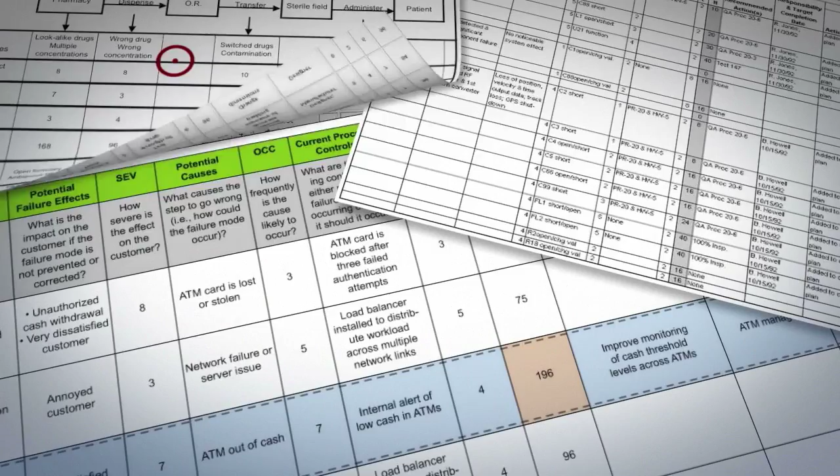Unfortunately, manufacturers regularly incur huge costs related to product recalls, warranty relief, and litigation ensuing from poorly envisioned and executed products and systems. Failure Mode and Effects Analysis, FMEA, is the primary approach used across industries in identifying possible product failures. When conducting FMEAs, engineers ask, what can potentially go wrong here? Finding the answer to this question usually involves numerous and tedious brainstorming sessions. The randomness of brainstorming cannot guarantee that all potential failures are discovered, and that no major ones are missed.

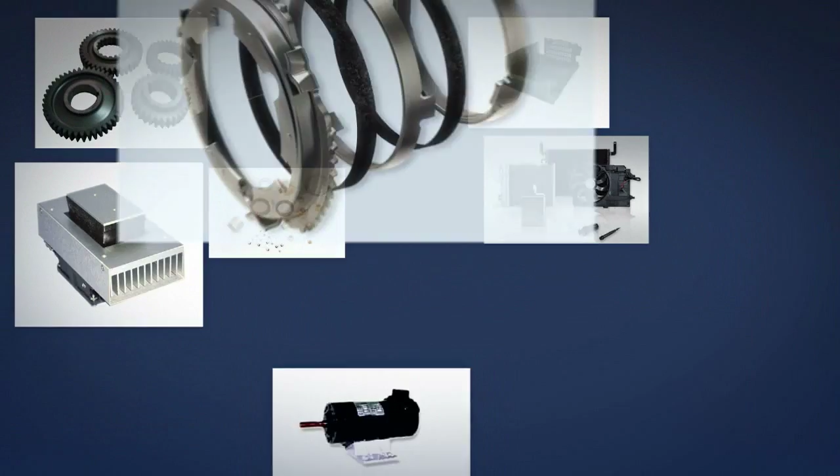In a complex system, such as an automobile, thousands of failure modes may occur, and a comprehensive FMEA may take weeks to complete, even by a team of experienced specialists. The subjective outcome depends heavily on the personal qualifications of these specialists. Complexity is further exacerbated by the integrative nature of modern products, which incorporate highly diverse components based on mechanical, electronic, thermal, chemical, and other properties. Such diversity makes it extraordinarily difficult for engineers, most of whom are narrow subject matter experts, to effectively communicate with one another during the FMEA stages in the product development process.

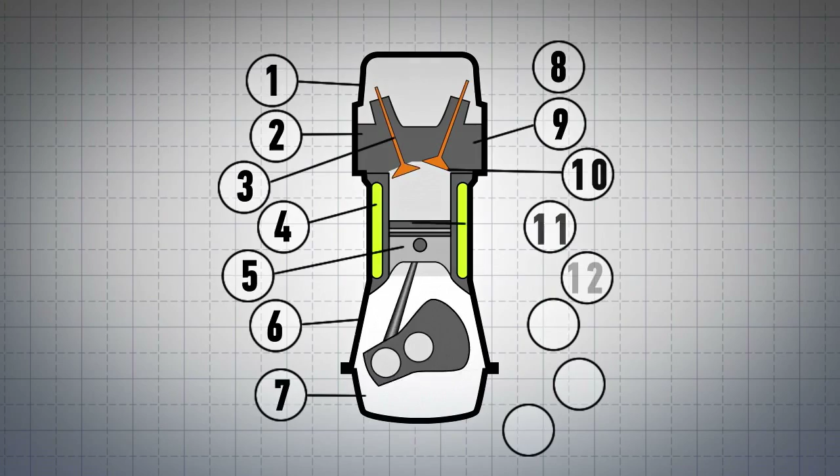As a result, a comprehensive analysis of a relatively simple assembly, one consisting of just 15 to 20 parts, may take weeks to complete. Yet the experience of thousands of manufacturers around the world clearly demonstrates that even such lengthy analyses may still result in incomplete FMEAs, and all too often in major systemic failures. Naniva has developed a breakthrough software solution for the automated detection of potential failure modes in products and processes. TechScan enables the recognition of potential failures caused by numerous and diverse factors, such as mechanical fatigue, thermal and electrical stresses, erosion and corrosion, variations in production, typical wear and tear, and many others.

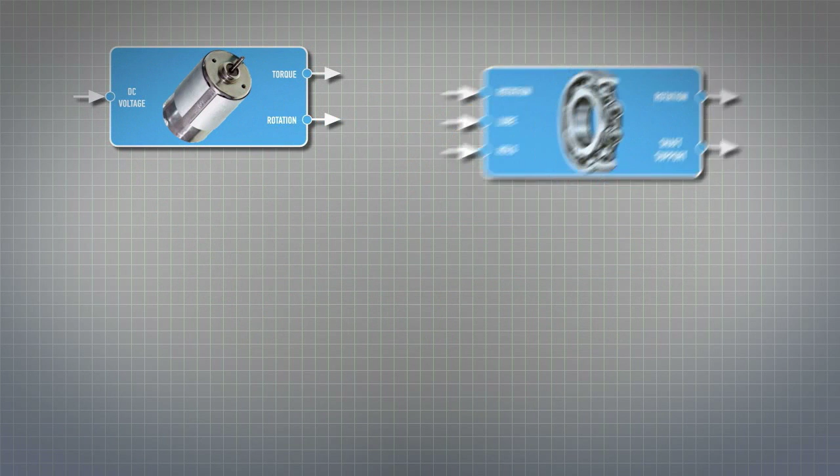TechScan is a universal solution. It is adaptable to the task of automating failure diagnosis in virtually any product, from a child's toy to an aircraft carrier. TechScan is based on the original method for modeling cause-effect chains in complex technological systems. TechScan's knowledge base contains models of hundreds of typical components. These are bolts, nuts, springs, shafts, bearings, seals, valves, motors, wires, switches, and countless other components. The model of a typical component takes into account the streams of energy and materials that flow through this component, as well as the materials the component is made of. These component models, similar to Lego pieces, allow for the construction of the prevailing majority of modern products and technologies.

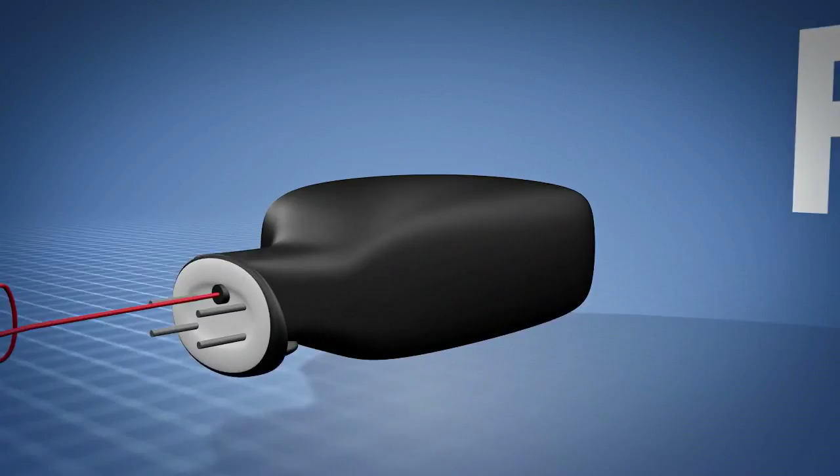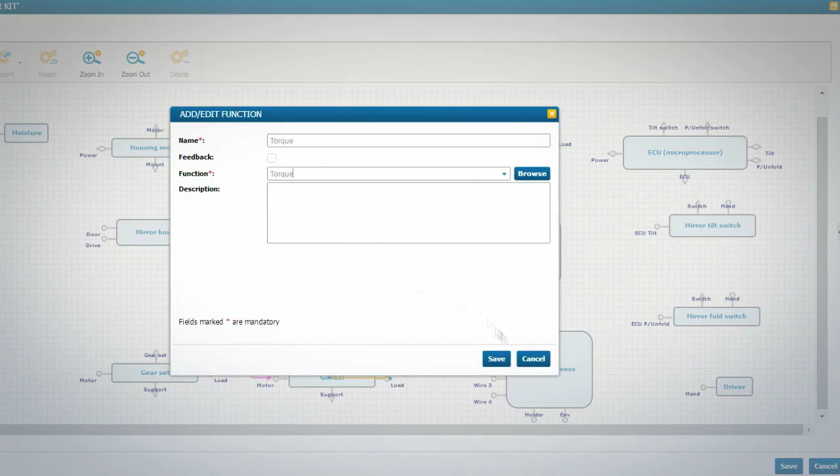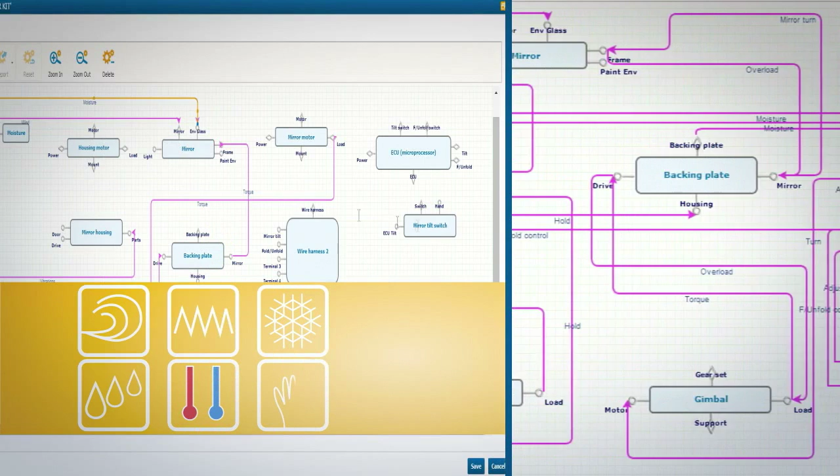To understand how TechScan works, consider a somewhat simplified analysis of a generic automotive side view mirror. The side view mirror is a multi-component system comprised of mechanical, electromechanical, optical, and electronic parts and assemblies. TechScan analysis of the mirror begins with building its structural model. Next, a functional model is built. Various other components and factors are taken into account: adjacent parts, numerous environmental factors such as wind, moisture, vibration, heat and cold, the driver's hands, etc. The functional model is ready.

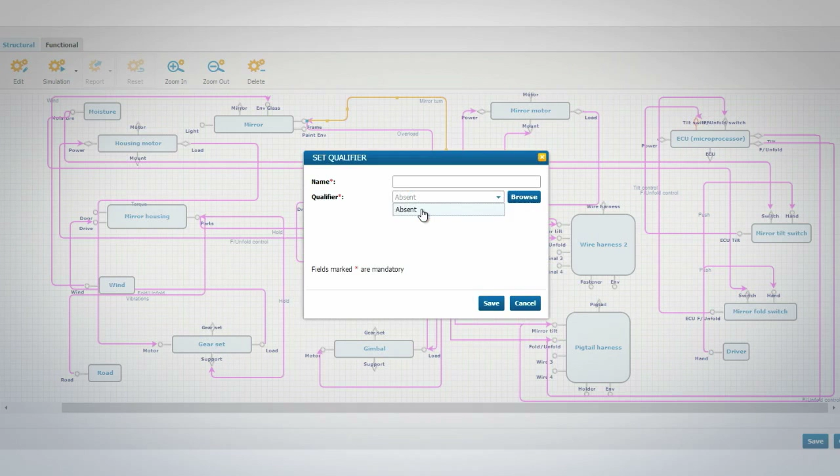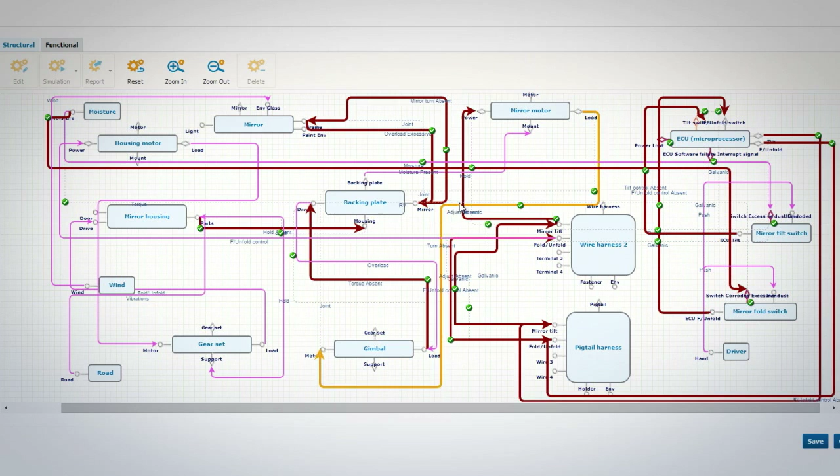We can now run the failure mode simulation. Suppose we want to find out under what conditions the mirror lens will not move. We assign the failure mode absent to the function mirror turn and click the simulation icon. Several seconds later, the screen changes. It now shows numerous cause-effect chains that may lead to this major failure. A detailed description of all the detected failure causes, and there are dozens of them, is found in a report generated upon the user's request.

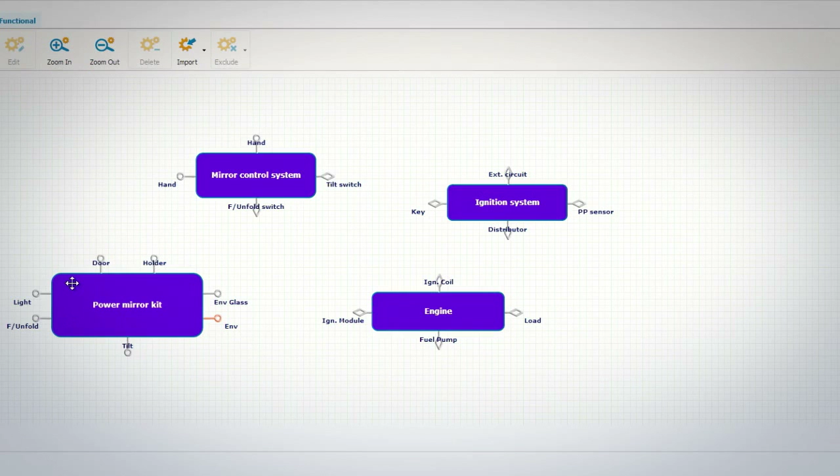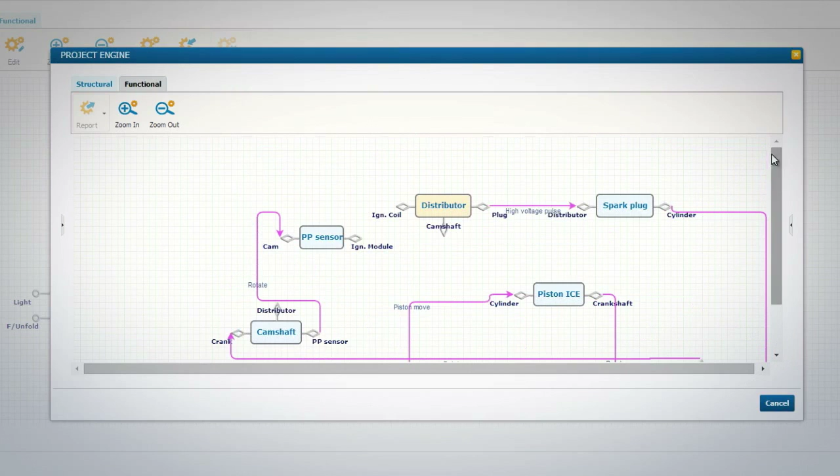TechScan is capable of analyzing really complex systems comprised of dozens and even hundreds of parts. To this end, multi-component systems are represented as single assemblies. This approach allows for finding out how a change in one part of a complex system might affect other remote parts. The model you're observing on the screen includes the side view mirror, the ignition system, the fuel pump, and the engine. What might happen when you insert the key into the ignition switch, turn the switch on and decide to adjust the position of the mirror?

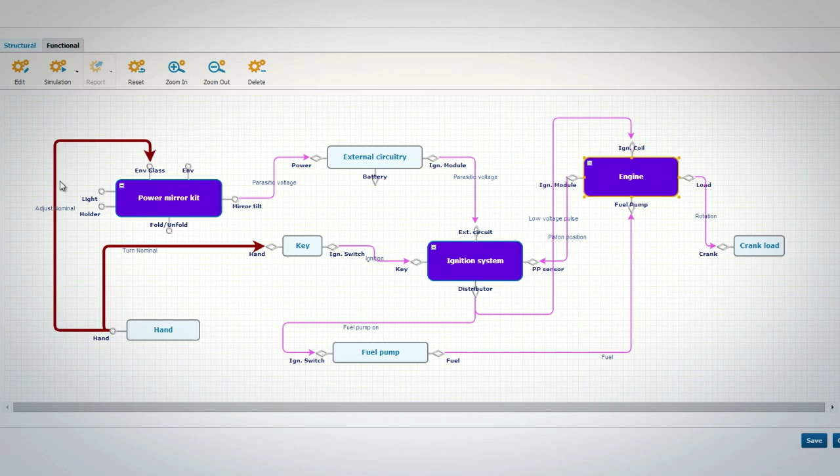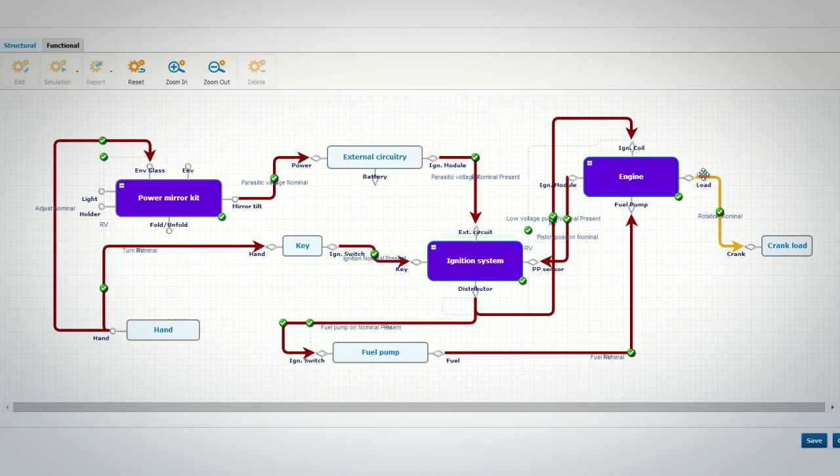The pivot motion of the mirror will cause the DC motor to rotate, thus converting it into a DC generator. The voltage from this generator will flow, via the external circuitry, to the ignition system, and from there to both the fuel pump and the engine. This may result in a spontaneous start of the engine. An unlikely scenario? Well, several years ago, this exact failure mode forced one automaker to spend millions on warranty relief. Notice the speed and comprehensiveness of the TechScan-based analysis.

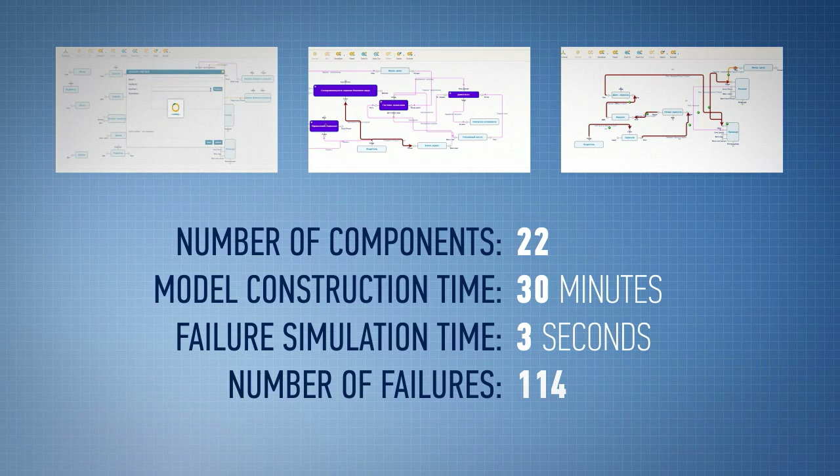Now then, let us sum up. TechScan's benefits are extraordinarily high speed of analysis, unattainable via conventional or manual FMEA. High reliability of failure detection. Universality. The ability to rapidly analyze complex systems. Applicability to the early stages of the product development process. Unlimited model reuse and editing.